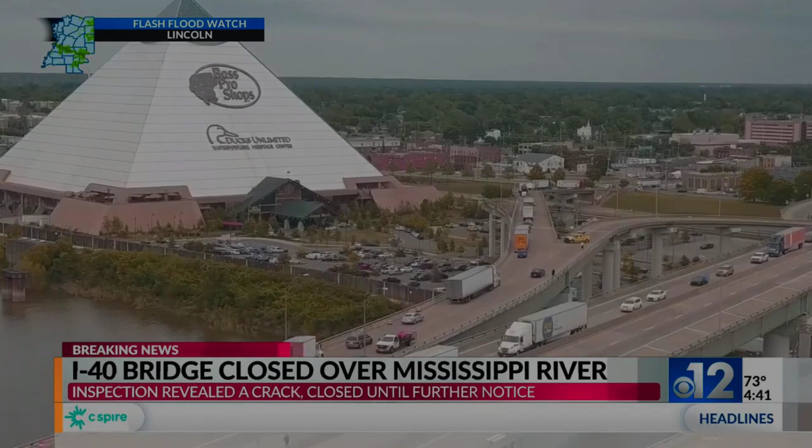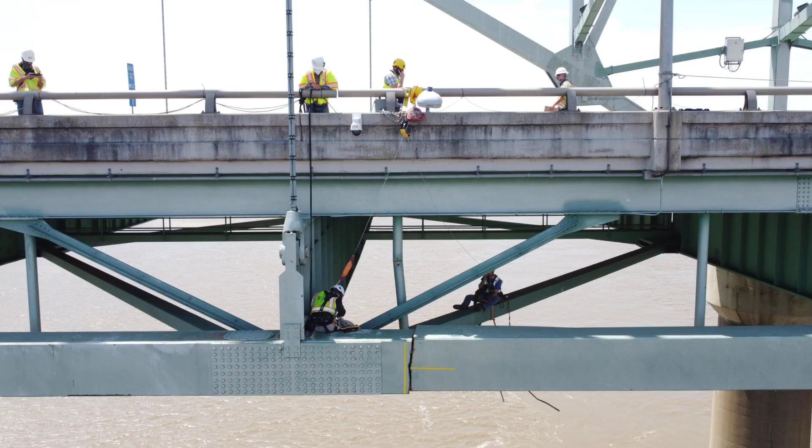May 2021. Inspectors found a massive crack hidden deep within the bridge built in 1973 that carries over 50,000 vehicles a day across the Mississippi, one fracture in a single non-redundant beam. If that piece had failed, the entire Hernando de Soto Bridge could have collapsed, closing a critical artery of American freight overnight. But here is the alarming part.

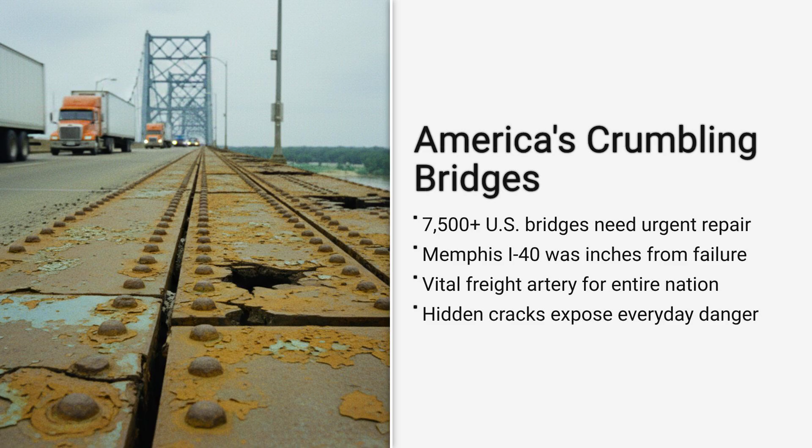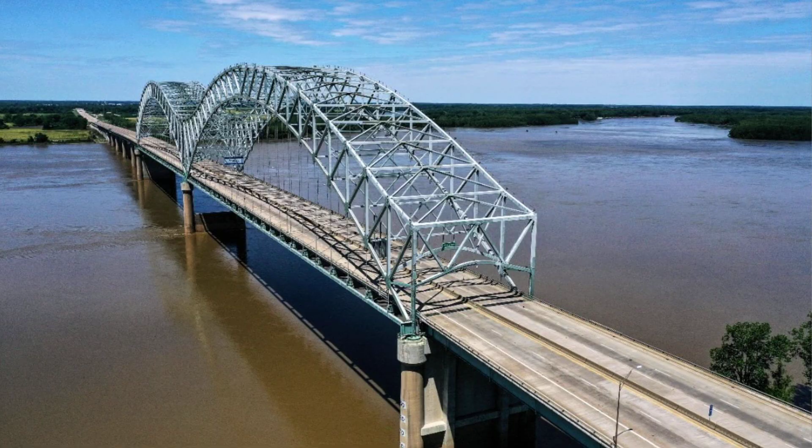Across the U.S., more than 7,500 bridges are classified as structurally deficient. The nation's overall infrastructure just earned a C- grade, and repair funds remain slow even after billion-dollar legislation. So how did America's most indispensable bridge come inches from disaster? And what does it reveal about the fragile state of everything we depend on?

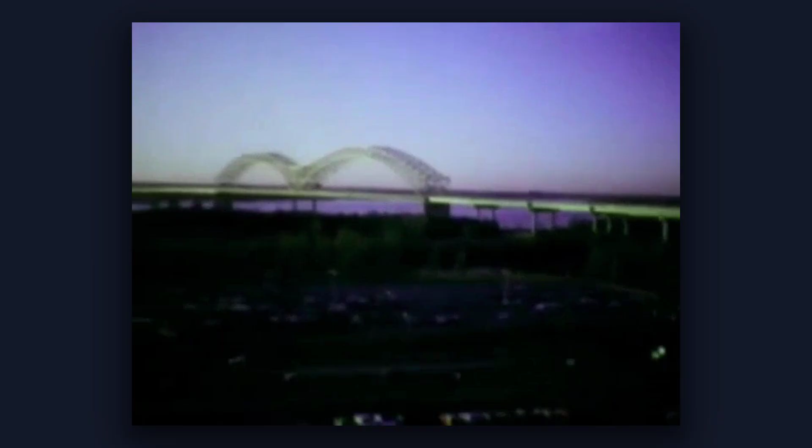When the Hernando de Soto Bridge first opened in 1973, it represented the promise of modern engineering, a sweeping steel arch stretching nearly 2 miles across the Mississippi River. The design was ambitious for its time, built to carry the relentless flow of interstate traffic between Memphis, Tennessee, and West Memphis, Arkansas. Over the decades, the bridge became a fixture of daily life and commerce in the region, quietly absorbing the weight of more than 50,000 vehicles every single day.

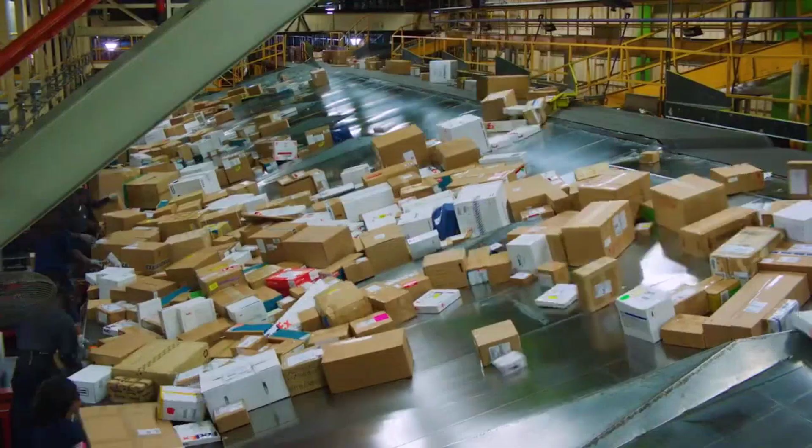That number is not just a statistic. It means thousands of commuters, families, and truck drivers depending on this crossing to get to work, deliver goods, and keep shelves stocked across the country. Roughly 30% of that traffic is heavy trucks, hauling everything from grain and steel to electronics and medical supplies. The bridge is a key link in a supply chain that stretches from the Gulf Coast to the Midwest and beyond.

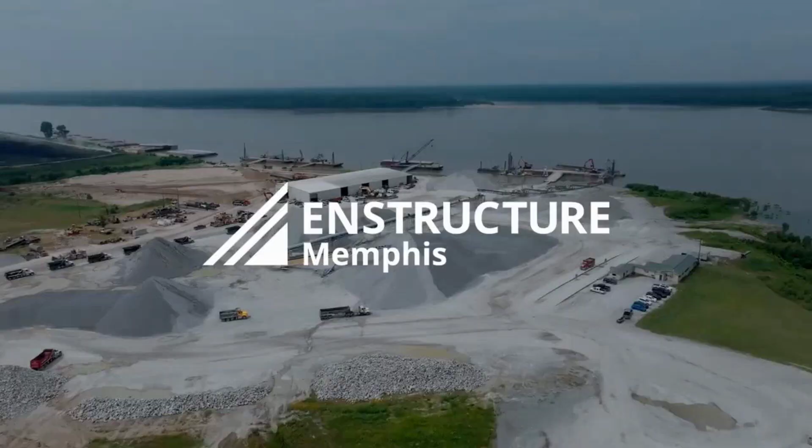Every hour, an unbroken stream of 18-wheelers and passenger cars rumbles across its 6 lanes, feeding the economic engine of Memphis, a city whose port handles more than $9 billion in goods each year. The Interstate 40 corridor itself is valued at over $400 billion in annual freight, and for many shippers, there is simply no practical alternative. Behind the scenes, the Tennessee Department of Transportation, called TDOT, acts as the bridge's caretaker. Their teams are responsible for regular inspections, maintenance, and emergency response if anything goes wrong.

The stakes are enormous. A single closure can disrupt regional commerce, strand travelers, and trigger costly detours for tens of thousands of people. For TDOT and its partners, the challenge is constant vigilance, because the bridge is not just a local crossing, but a critical artery in the nation's infrastructure. Its daily burden is a reminder that even the most impressive structures are only as strong as their weakest point.

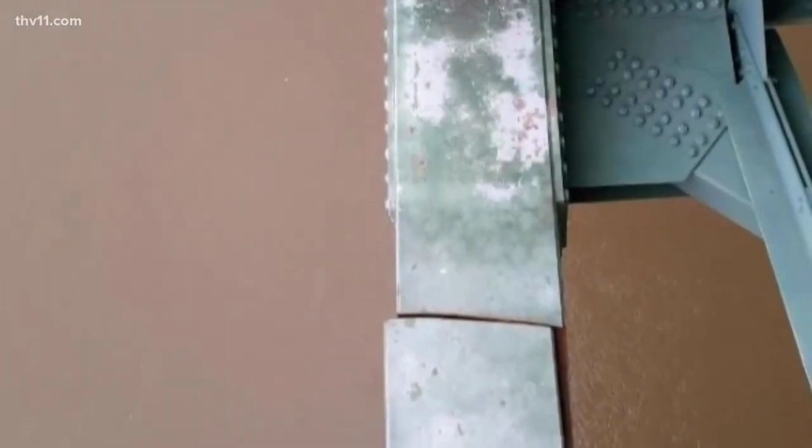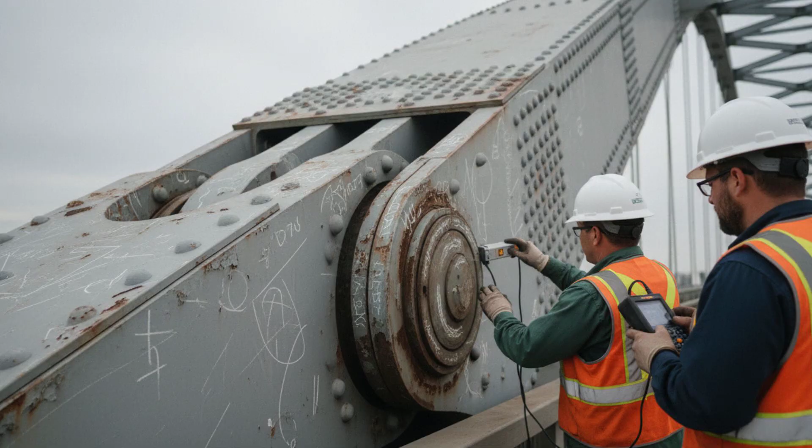The Hernando de Soto Bridge was designed as a tied arch structure, a type of bridge where the arch's outward forces are held in check by a long steel member running beneath the roadway. In this case, that member is called the tension tie. According to federal standards, it is classified as a fracture critical member, abbreviated FCM. That means if it fails, there is nothing else to hold the bridge together. There is no backup. The entire span depends on the integrity of this single steel box, welded from thick plates and running the length of the arch.

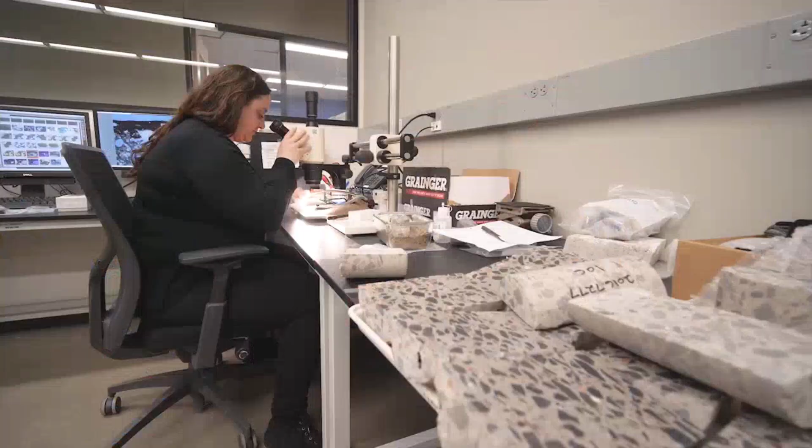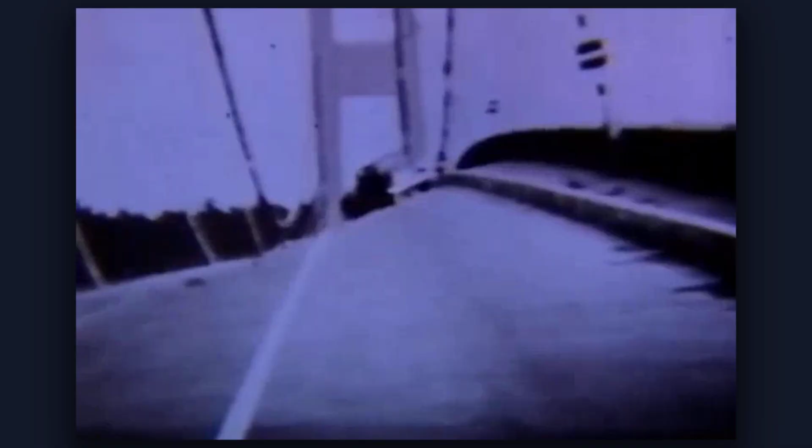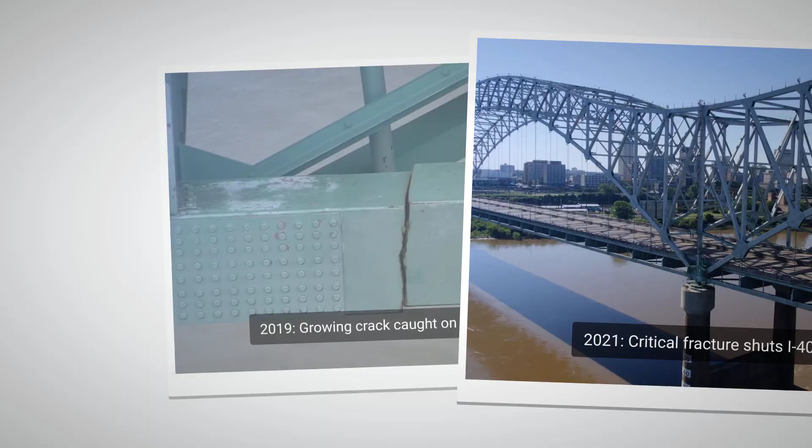Forensic engineers from Wiss, Janney, Elstner Associates, the team called in after the 2021 closure, described the risk in blunt terms. A complete break in the tension tie could have caused a partial or total collapse of the bridge. The fracture that was discovered was not just a surface crack. It ran through the outboard side plate, the top cover plate, and into the bottom plate, evidence of a failure that had started years earlier, likely at a weld repair site, and then progressed unseen. Their metallurgical analysis pointed to hydrogen embrittlement as the culprit, a tiny flaw at the weld that, under decades of stress from traffic, grew into a critical crack.

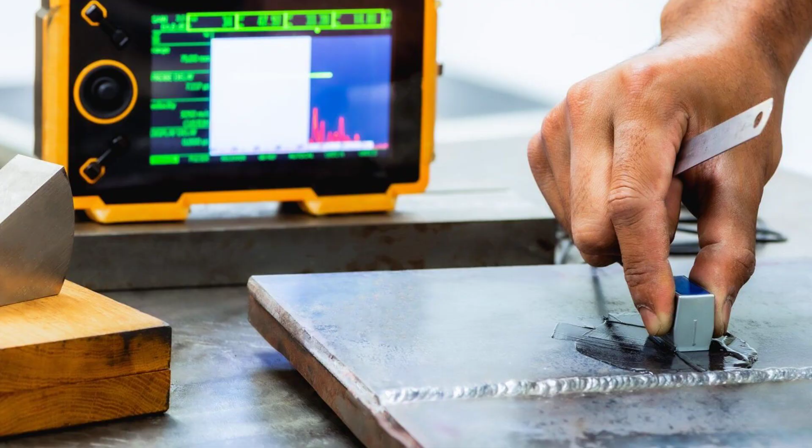Unlike some bridge designs, the tied arch at Memphis offers no redundancy. If the tension tie is severed, the arch cannot transfer its load, and the span could fall. This is what federal highway engineers mean when they use the term fracture critical. There is no second chance. That is why after the crack was found, inspectors used ultrasonic testing, sending sound waves through the steel to check for hidden defects. It is a technique that can spot flaws deep inside a member, even when nothing is visible from the outside. The forensic findings made clear, the bridge's safety rested on a single, non-redundant piece of steel, and the margin for error was razor thin.

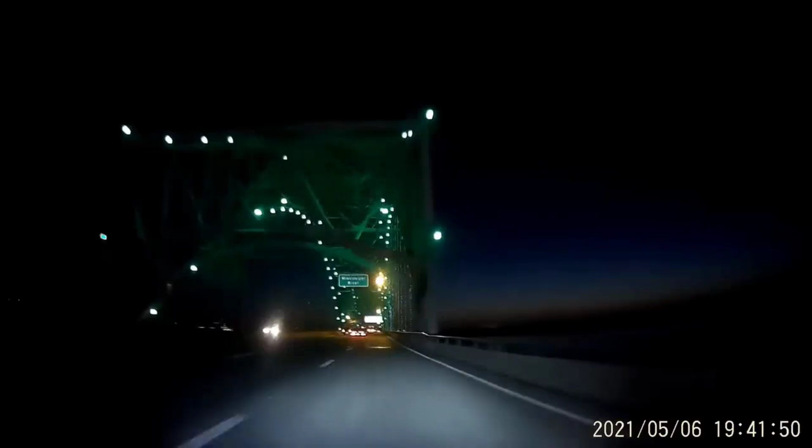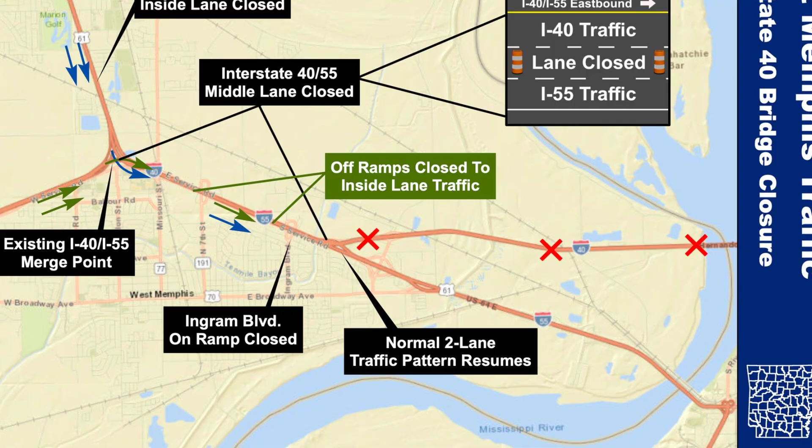Freight operators remember the day the bridge closed as a turning point. With Interstate 40 suddenly off limits, every truck headed across the Mississippi was forced onto the old Interstate 55 bridge 5 miles south. That detour might sound minor on a map, but for drivers hauling perishable goods or just-in-time shipments, it meant hours lost in crawling traffic. Each extra mile burned more fuel and pushed delivery schedules into chaos.

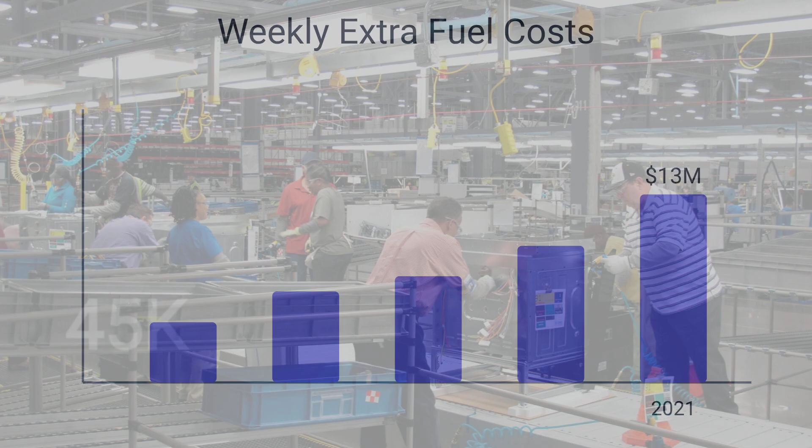According to Tennessee Department of Transportation data, the rerouting added about 5 miles per trip, and for nearly 30,000 trucks a day, that translated to over $13 million a week in extra fuel costs alone. Local manufacturers, surveyed by the Memphis Chamber of Commerce, reported losing an average of $45,000 a day as shipments stacked up in warehouses and supply chains seized.

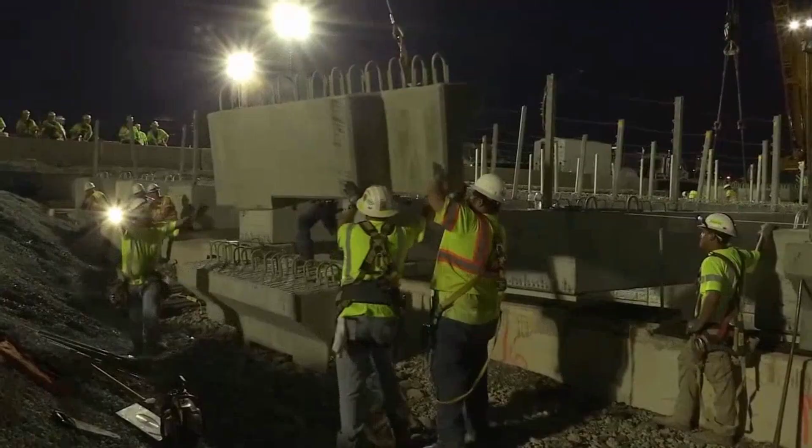One logistics manager described the scramble: trucks idling for hours, drivers on the phone with dispatch, customers calling for updates no one could give. At the same time, Tennessee Department of Transportation crews worked around the clock. Engineers, welders, and inspectors were on rotating shifts, floodlights blazing through the night.

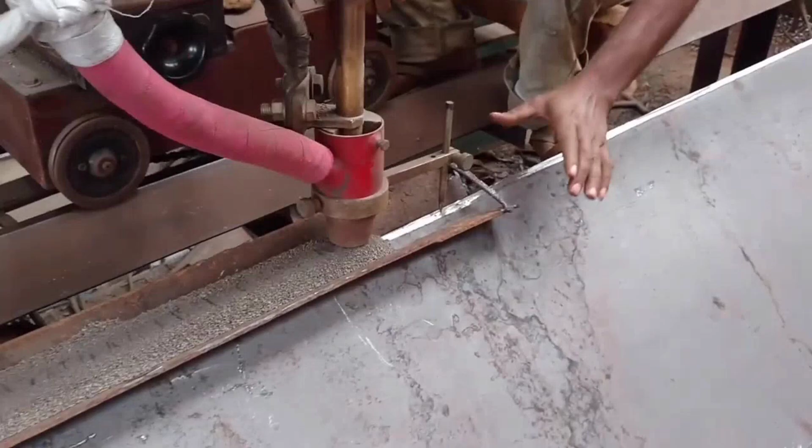Temporary steel plates were bolted over the fracture to stabilize the tension tie, while fabrication shops raced to build permanent splice plates. Every hour counted, not just for the bridge, but for the thousands of people and billions of dollars moving through Memphis each day.

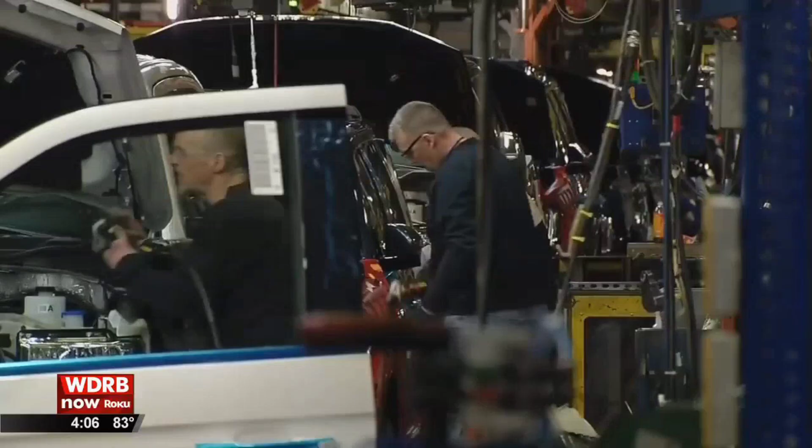The disruption rippled far beyond the city. Grocery stores in Missouri waited on delayed produce. Auto plants in Kentucky adjusted assembly lines. From the outside, it was just a closed bridge. On the ground, it was a test of how much strain a single point of failure could put on an entire region. For everyone who depends on that river crossing, the lesson was clear. When the margin for error is razor thin, the consequences aren't just technical, they're personal and they're costly.

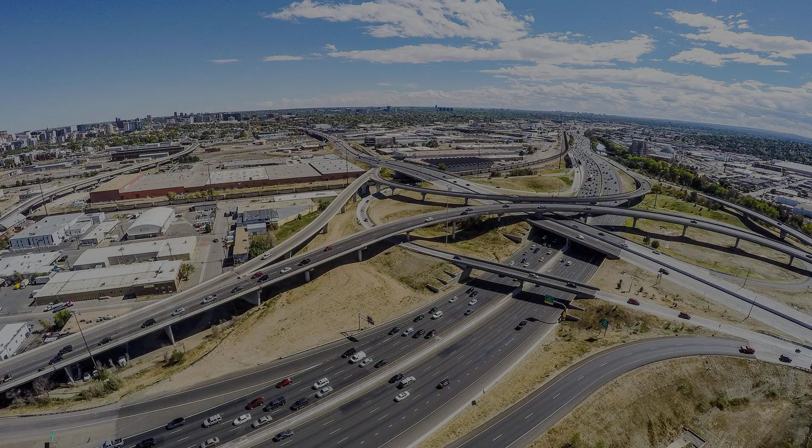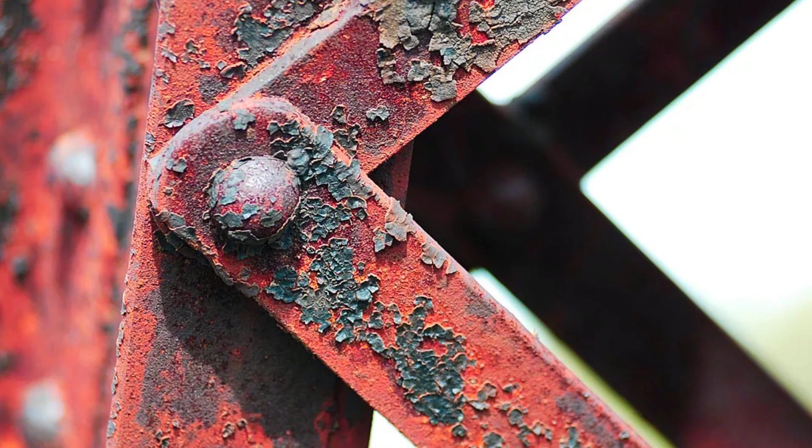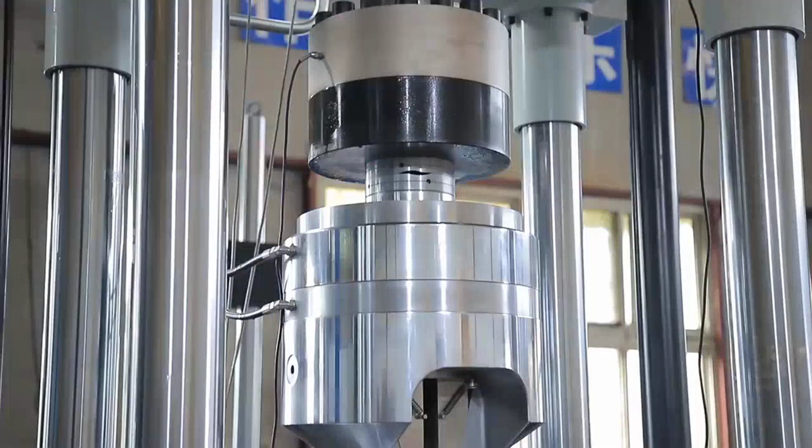Many of these bridges form vital links in the country's freight network, handling trucks, commuters, and emergency vehicles with little margin for error. The Memphis crossing is just one piece of a much larger puzzle, where aging steel and concrete are stretched to their limits by decades of use and millions of load cycles. The American Society of Civil Engineers grades the nation's bridges at a C and the overall infrastructure at a C-. That is not a passing mark, it is a warning.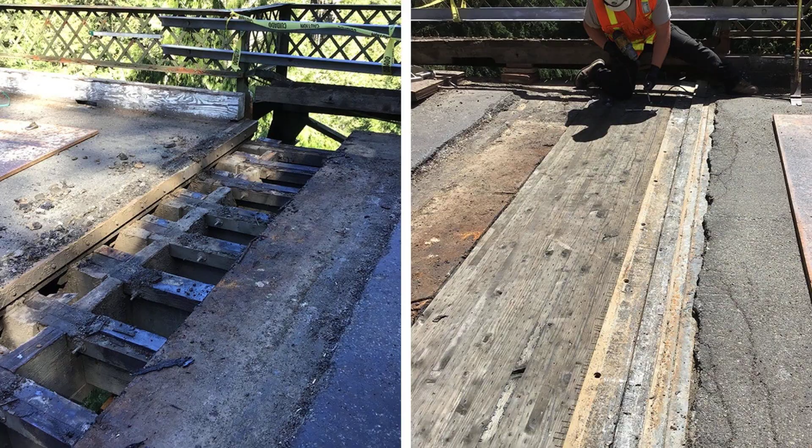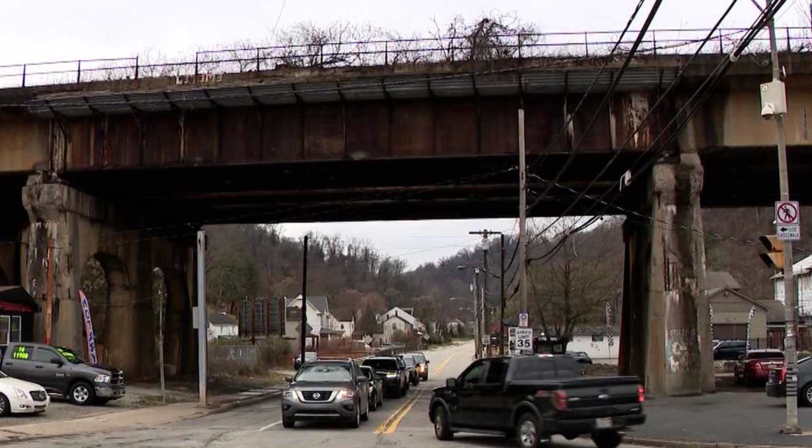Even though the number of deficient bridges has fallen slowly over the past decade, progress is outpaced by the sheer scale of the backlog. Many of the most vulnerable structures are fracture critical, like the Memphis bridge, meaning a single failure could have consequences far beyond the local area. The Hernando de Soto Bridge is just one example, but its story is echoed in thousands of river crossings, highway overpasses, and urban viaducts from coast to coast. The numbers do not just reflect aging infrastructure, they reveal a national challenge that demands attention, resources, and a willingness to confront uncomfortable risks.

Congress passed the Infrastructure Investment and Jobs Act with the promise of transforming America's aging bridges. The law set aside $27 billion specifically for bridge repair, a figure that dwarfs previous federal efforts. But the money has not brought quick fixes. According to the Federal Highway Administration, only about half of the authorized funds had reached actual projects by 2024. The rest sits in a kind of bureaucratic limbo, caught up in layers of approvals and matching requirements.

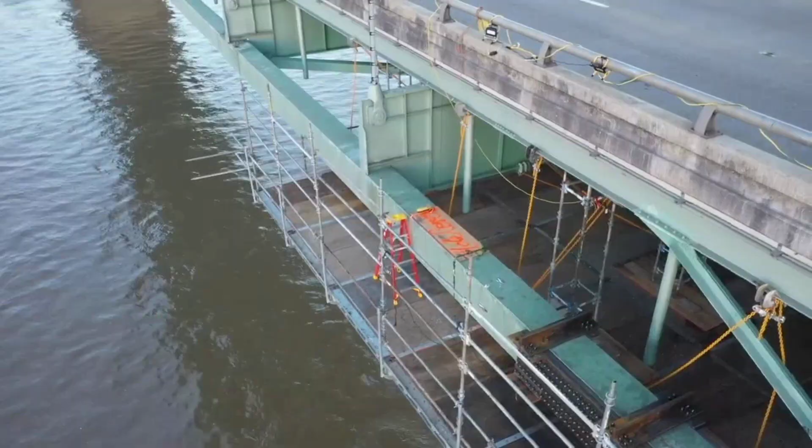States are required to provide a share of the funding, often 20% or more, before they can access federal grants. For cash-strapped transportation departments, especially in rural or lower revenue states, coming up with that match can delay projects for years. Even when money is technically available, it does not flow straight to the bridges most at risk. Each grant application must pass through a maze of federal guidelines, environmental reviews, and competitive scoring. The process can stretch for months into years before construction even begins.

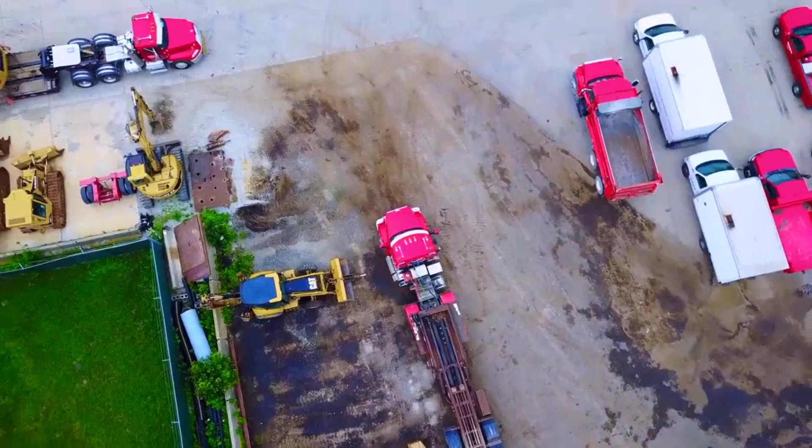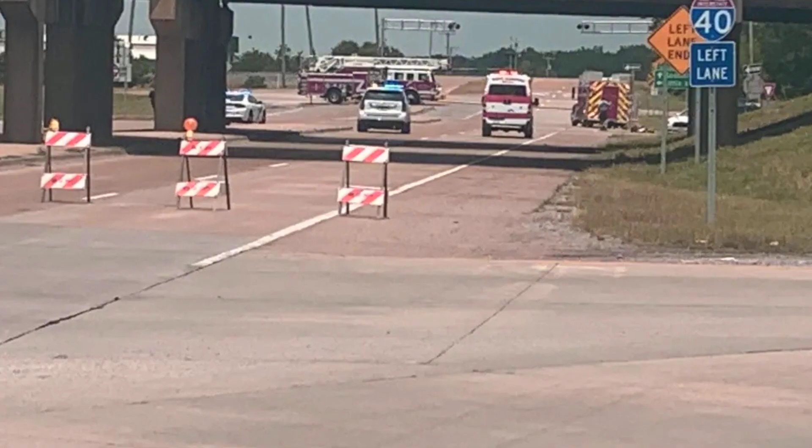A policy analyst at the Eno Center for Transportation described the system as a pipeline clogged with paperwork. He pointed out that while Congress celebrates big numbers, the reality on the ground is far slower. We have the money on the books, but the bridges are not getting fixed. The result is a backlog that grows even as new funding arrives.

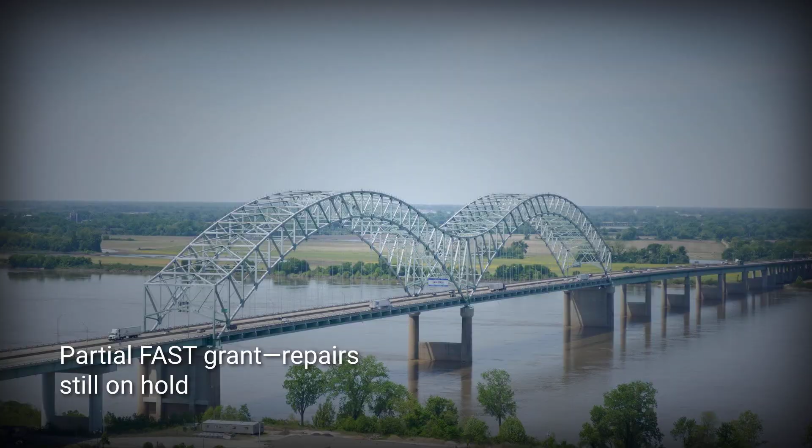The Hernando de Soto Bridge, for example, received partial funding through the FAST grant stream, but a significant portion of its repair budget is still waiting for final approval. Across the country, thousands of bridges remain stuck in the same slow-moving queue, highlighting the gap between legislative ambition and the hard realities of public works.

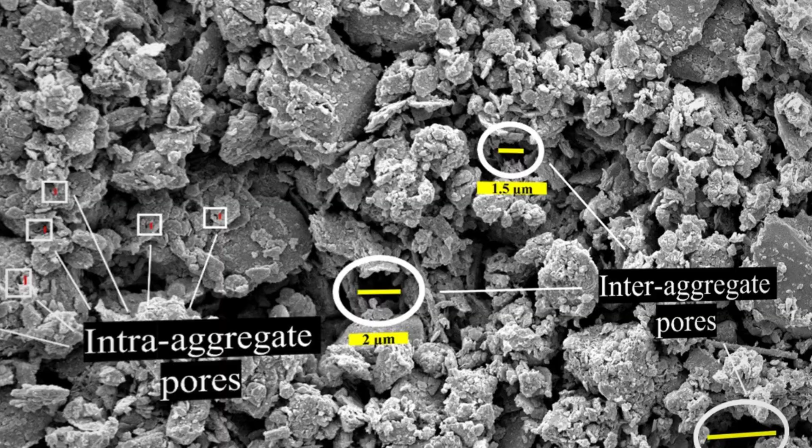Beneath the sprawling streets and towers of Mexico City lies the soft, shifting memory of a vanished lake. This is the basin of ancient Lake Texcoco, a vast depression once filled with water and now packed with thick layers of clay and silt left behind by centuries of sedimentation. These lakebed deposits, sometimes reaching depths of 15 to 30 meters, are not the solid ground most cities rely on. Instead, they are made up of fine-grained particles and a high proportion of empty space, or voids, between them.

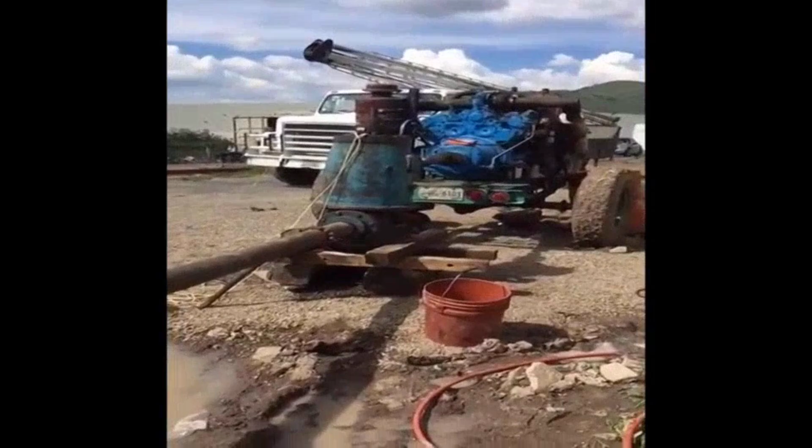This unique structure means the ground is naturally prone to compression. Even before modern development, the weight of overlying sediments and the slow escape of water from these clays caused the ground to settle, sinking by several centimeters each year. UNAM geotechnical researchers have spent decades mapping the mechanics of this slow-motion descent. Their studies show that the process begins at the microscopic level.

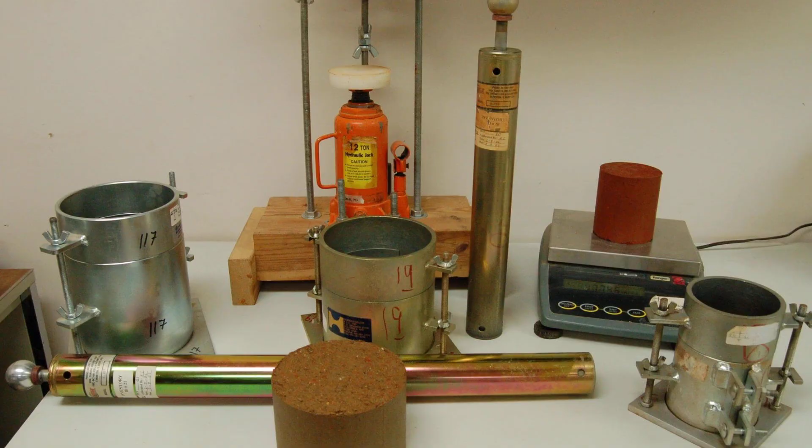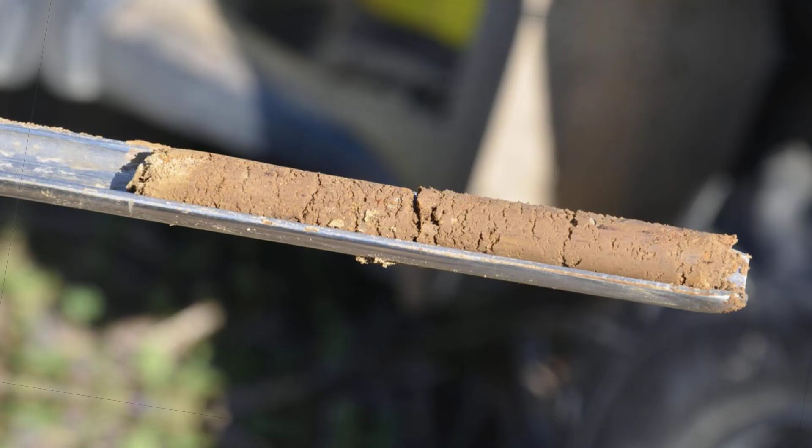As water drains from the clay, the particles rearrange and pack closer together, causing the land above to drop. This compaction is especially intense in the former lakebed, where the soils are still saturated and loosely packed. Unlike the stable bedrock found beneath many world capitals, Mexico City's foundation is more like a sponge, one that compresses under pressure and never fully springs back.

Over the past century, this natural tendency has led to a staggering cumulative effect. By combining historical leveling surveys with modern satellite data, scientists have documented total subsidence of 9 to 10 meters across wide areas of the city. That is enough to swallow a 3-story building, and it is not an isolated event.

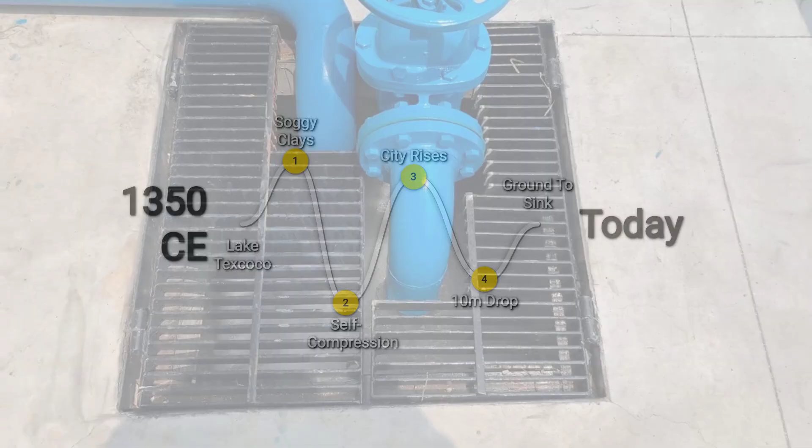The entire urban core, from the Zocalo to the outer districts, has slowly but relentlessly sunk closer to the old lakebed floor. While the ground would have settled to some extent even without human interference, the city's geology has set the stage for a much larger crisis, one that will be driven not just by nature, but by the choices people make above and below the surface.

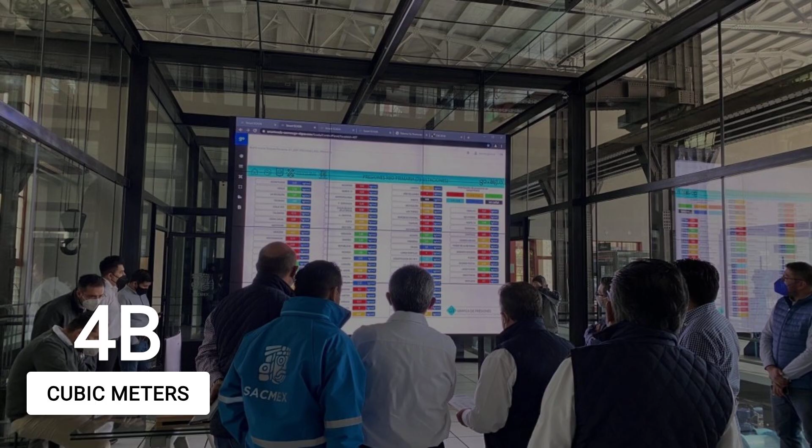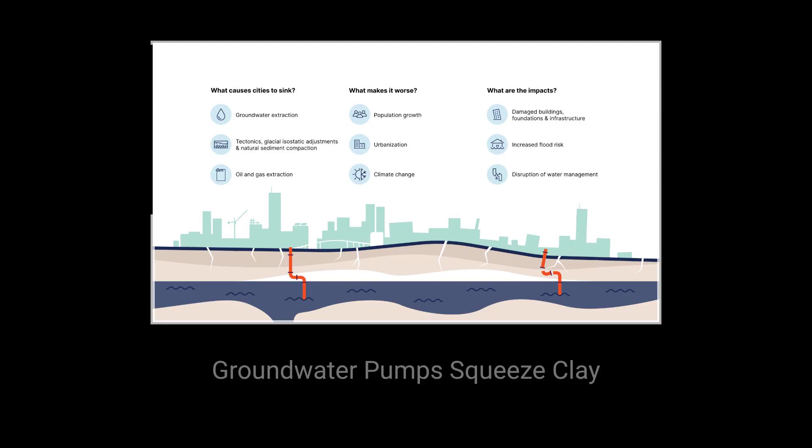Every day, Mexico City's water system pumps more than 4 billion cubic meters from the aquifer buried beneath the old lakebed. This relentless withdrawal is the city's main source of water, and its greatest threat. As pumps draw down the groundwater, the soft clays of the former Lake Texcoco compress, causing the ground above to sink. In some districts, the pace is staggering.

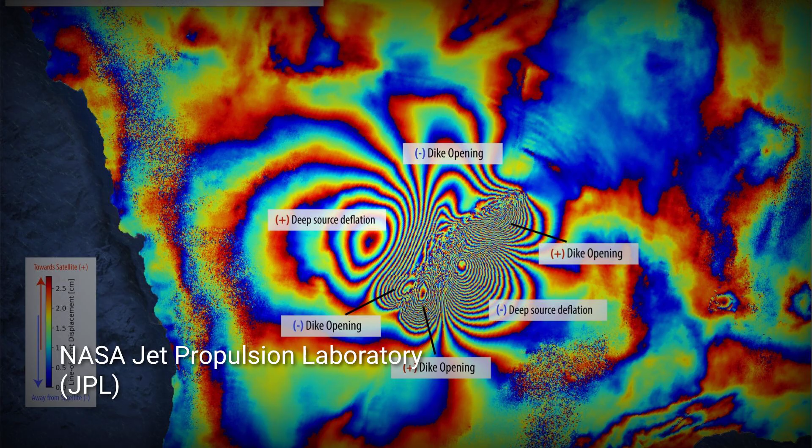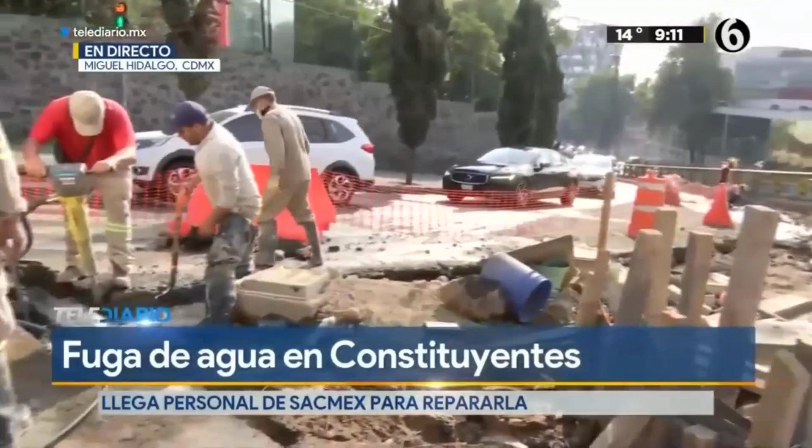NASA's Jet Propulsion Laboratory, using satellite InSAR radar, has tracked hotspots where the city drops by as much as 50 centimeters each year. These are not isolated pockets. Entire neighborhoods, home to millions, are caught in a slow-motion collapse. The consequences reach deep into the city's infrastructure. Water pipes, many laid more than 70 years ago, are now warped and broken by the shifting ground.

SACMEX, the municipal water authority, estimates that 40% of all water pumped into the system never reaches a tap. It leaks away through thousands of cracks, feeding the very subsidence that created the problem in the first place. The city loses nearly 2 million cubic meters a day, enough to supply a medium-sized metropolis, while residents in outlying boroughs line up for water trucks.

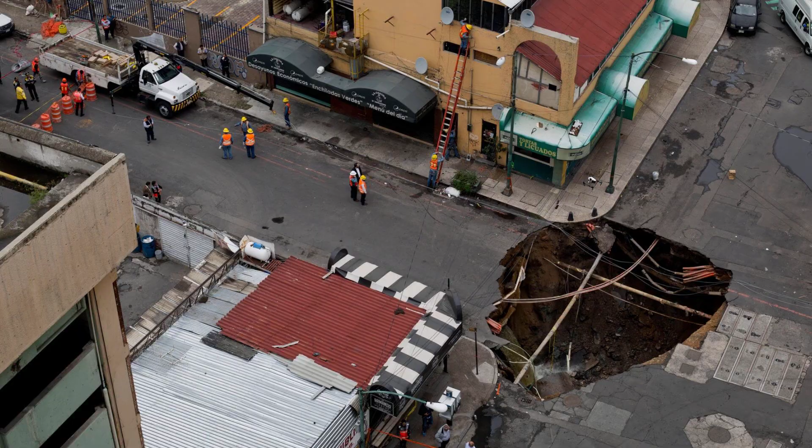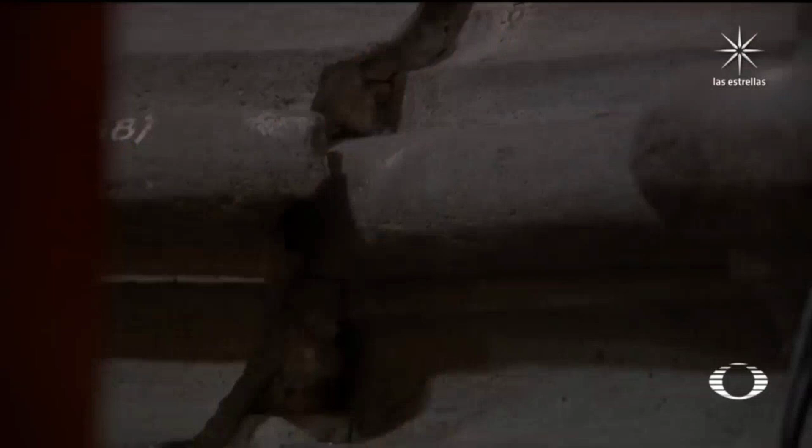The damage is visible above ground too. The Palace of Fine Arts, a national icon, has tilted and sunk more than 4 meters since it opened. The Metropolitan Cathedral, once the tallest structure in the city, now leans at a visible angle. Engineers tasked with preserving these landmarks have documented new cracks and foundation shifts every year.

Peer-reviewed studies from UNAM and NASA's Jet Propulsion Laboratory confirm that the city's core, from the Zocalo to Iztapalapa, is sinking at a pace unmatched by any major city on Earth. For the 22 million people who call Mexico City home, this is not a distant threat. It's a daily reality, measured in centimeters, broken pipes, and the slow tilting of history itself.

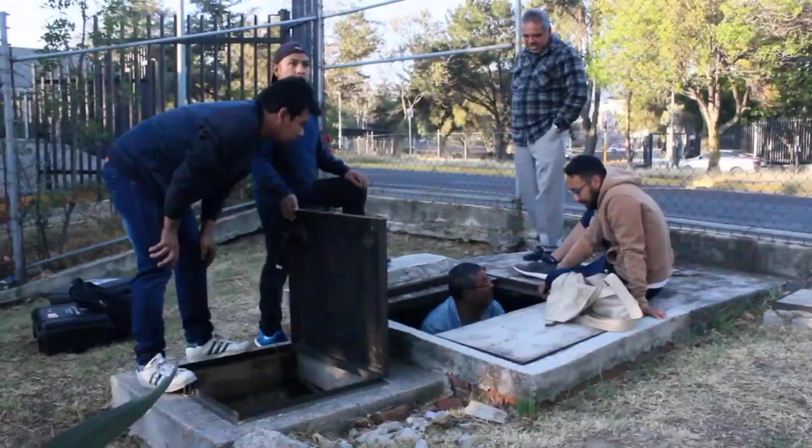No single intervention can halt the sinking of Mexico City, but scientists and engineers have assembled a menu of practical options. Managed aquifer recharge stands out among the most promising. In pilot projects led by UNAM and Conagua, treated wastewater is injected back into the aquifer beneath the city. Early results show that in some peripheral districts, the ground has even rebounded by up to 2 centimeters per year after extraction rates dropped. Yet these gains are fragile.

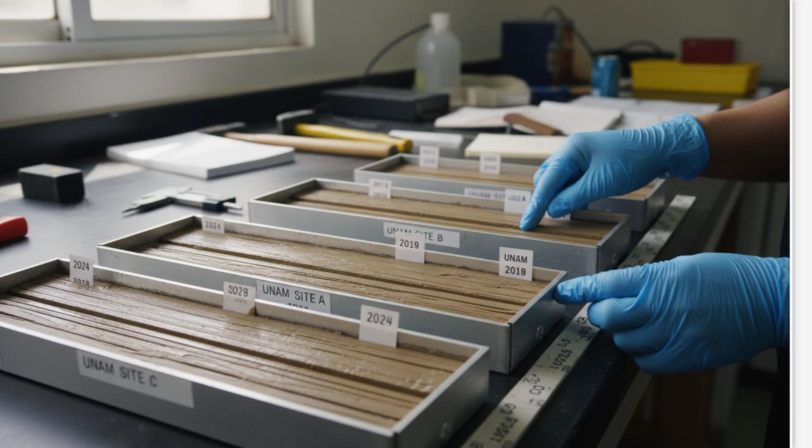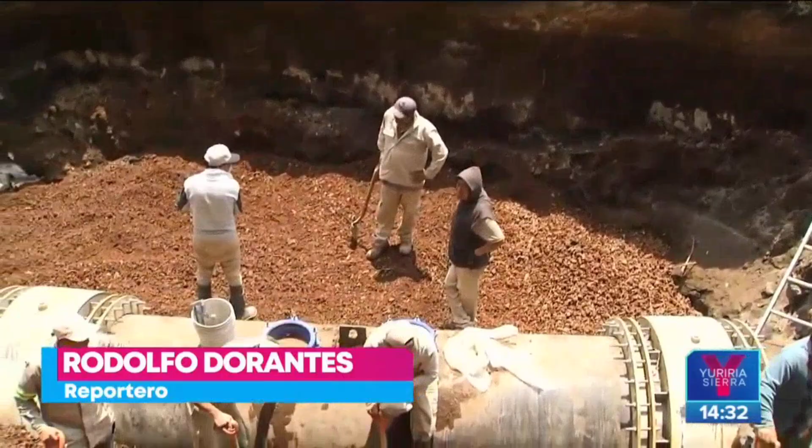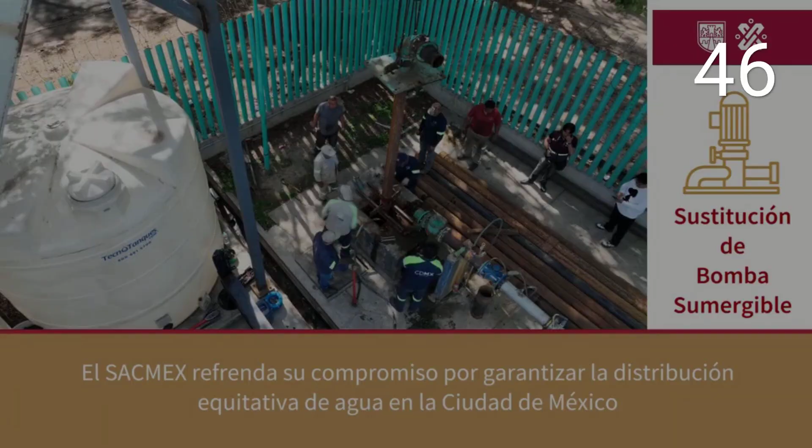High costs, complex geology, and the risk of contamination in clay-rich layers make large-scale recharge a slow, expensive prospect. Pipe repair and replacement offer more immediate relief. SACMEX, the city's water authority, has invested hundreds of millions of pesos in replacing leaky lines, aiming to recover flows lost from the Cutzamala system. In 2024 alone, 46 separate works target the worst leaks, building on earlier pilots that stabilized metro stations like Acatitla.

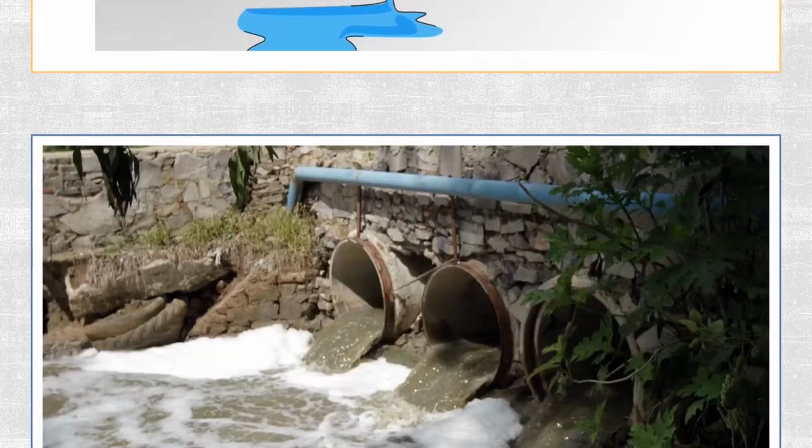Even so, the scale is daunting. About 40% of piped water still escapes through cracks, and the backlog grows as new breaks appear faster than crews can fix them. Regulating groundwater extraction is another essential step. UNAM researchers have called for strict caps and pricing reforms to rein in the city's dependence on wells, which still supply about 60% of all water. But political resistance is fierce, and enforcement remains patchy.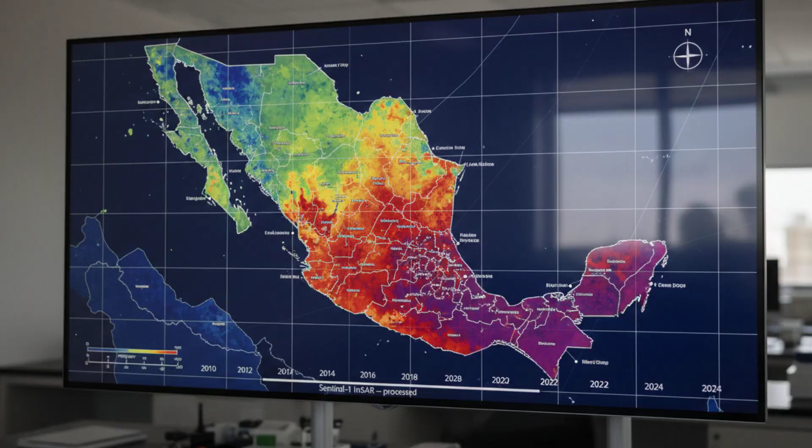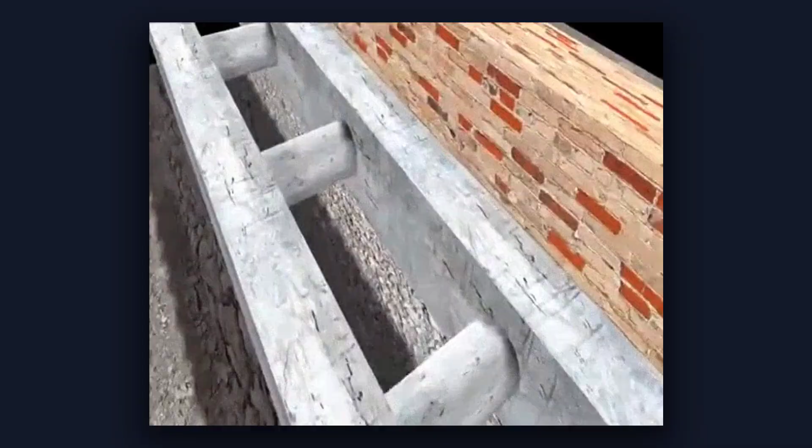Some progress is visible in satellite data. NASA's InSAR maps show that districts with reduced pumping have slowed their descent, but deep compaction continues in the historic core. For landmarks at risk, engineers have turned to targeted underpinning and micropiles. The Palace of Fine Arts and sections of the metro have received these reinforcements, buying time but not solving the root problem. Expanded satellite monitoring now guides these efforts, with real-time InSAR data helping authorities spot new hotspots before cracks appear at street level. No solution is quick or easy.

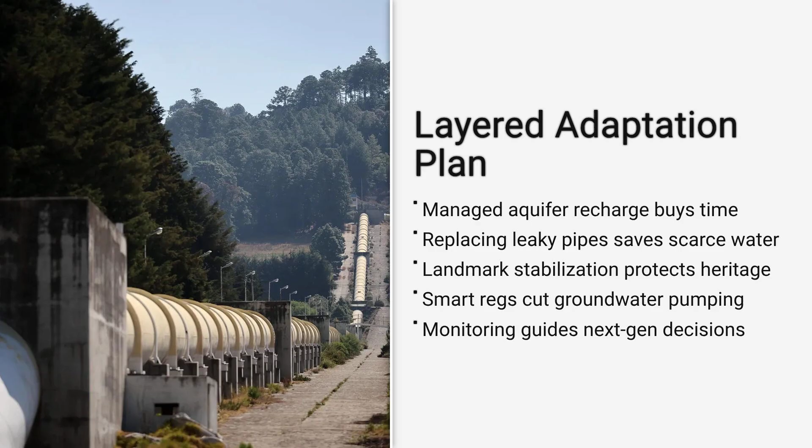The city faces trade-offs between cost, disruption, and the sheer scale of intervention needed. Experts from UNAM and NASA agree the best path forward is a layered approach, combining recharge, leak reduction, smarter regulation, and constant monitoring. Even then, the city will likely keep sinking, just more slowly. The hard truth is that adaptation, not reversal, is the most realistic outcome for the next generation.

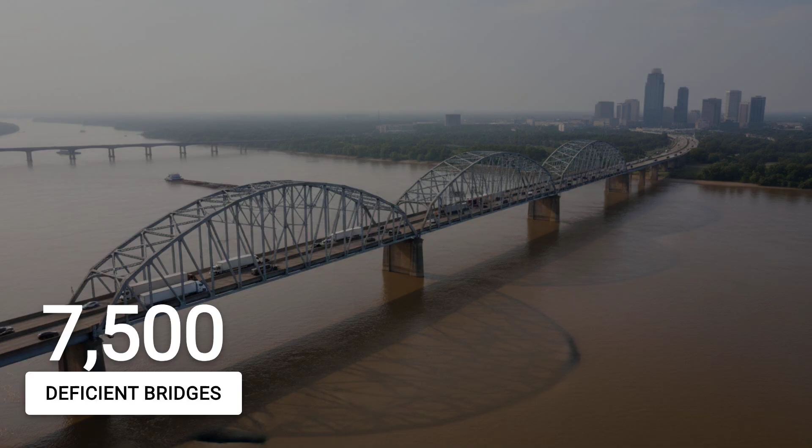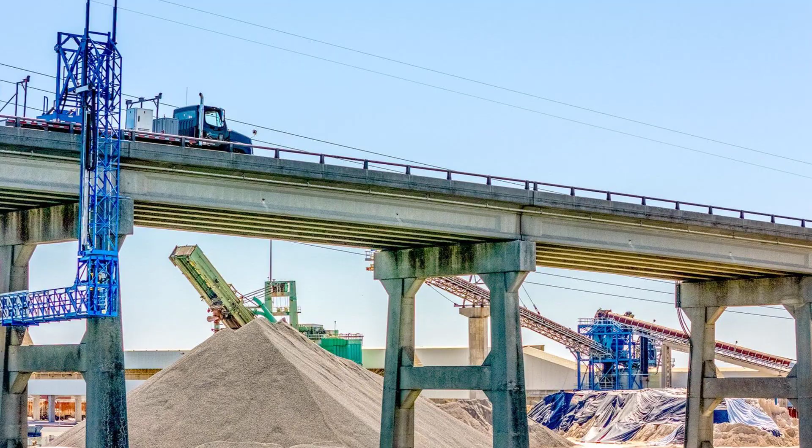Right now, over 7,500 US bridges are classified as structurally deficient. The Hernando de Soto Bridge, built in 1973 and carrying more than 50,000 vehicles a day, narrowly avoided becoming a headline tragedy. Even with the infrastructure bill, repairs lag behind the risk. The American Society of Civil Engineers still gives the nation's backbone a C-. Until we act, our luck is the only thing preventing catastrophe.